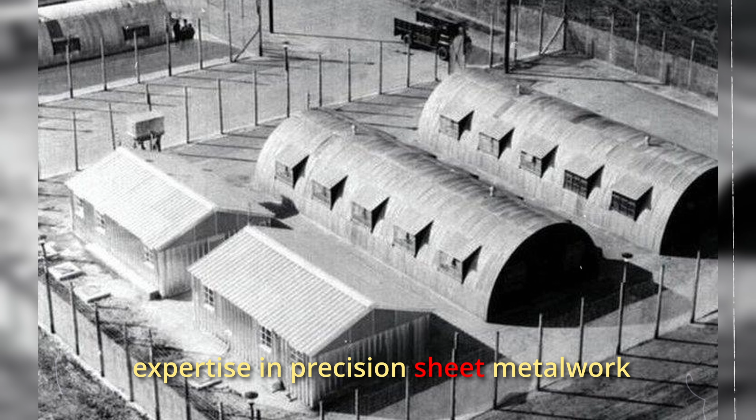The location is not selected randomly or chosen for convenience. Rhode Island possesses deep manufacturing expertise in precision sheet metal work from its jewelry and silverware industries, the kind of exacting metalwork that translates directly to manufacturing building panels with tight tolerances. The state also offers proximity to major steel mills in Pennsylvania and established shipyards that understand marine-grade corrosion resistance better than anyone else in the country.

In March 1942, the Navy assembles an unusual team representing a collision of different professional worlds and specialized expertise: structural engineers from the Stran-Steel Corporation, who have spent years building prefabricated farm buildings; architects from George A. Fuller Construction Company, who specialize in rapid assembly methods and modular construction; and Navy officers who have actually served extended tours in the Pacific theater and know what typhoon-proof really means in practice versus what it means on paper in a comfortable stateside office.

The team lead, Otto Brandenberger, brings farm building experience that turns out to be precisely right for this seemingly impossible problem. His Stran-Steel agricultural barns use self-supporting arched panels requiring no internal frame whatsoever, which means no wood for termites to devour and no complex joinery to fail catastrophically during violent storms.

Farm buildings face their own set of extreme environmental conditions: Midwest tornadoes with devastating wind speeds, massive snow loads that collapse weaker structures, temperature swings ranging from well below zero to over 100 degrees, and the expectation of decades of continuous use with absolutely minimal maintenance. Brandenberger's radical proposal violates every piece of conventional architectural wisdom accepted as gospel truth in 1942.

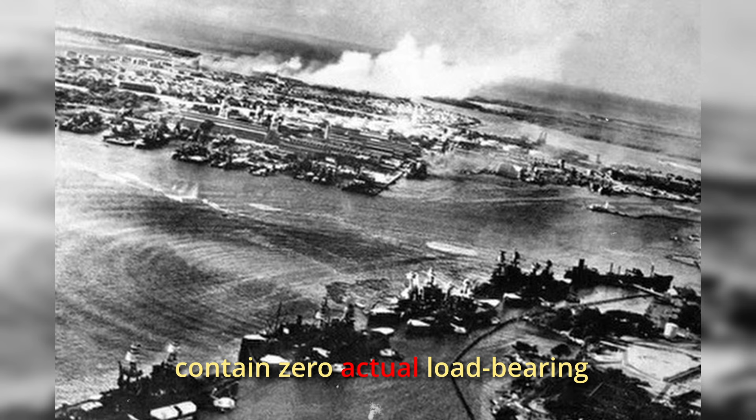The detailed British field reports read like genuine horror stories from a nightmare dimension, where buildings possess malevolent life and actively conspire against human occupants. But these reports provide the Quonset development team with something genuinely invaluable: a comprehensive checklist of everything that must be completely engineered out of the final design from day one before the first working prototype gets constructed and tested.

No wood can remain in direct contact with ground surfaces where moisture and destructive insects naturally concentrate their activity.

All steel components must receive hot dip galvanization treatment, not merely painted surface coating, because conventional paint fails completely in saltwater air within a matter of weeks. Ventilation systems must be aggressive enough to actively prevent interior condensation that literally rains from ceiling surfaces. Every single fastener must remain accessible for field replacement without requiring complete disassembly of the entire shelter structure.

By April 1942, the hybrid engineering vision crystallizes into something that might actually function in real-world combat conditions. Take the Nissen hut's genuinely brilliant arch geometry that has already proven itself effective across multiple combat theaters. Systematically strip out everything that makes it excessively heavy, environmentally vulnerable, or dependent on skilled construction labor. Incorporate Fuller's mass production philosophy that treats buildings as factory-manufactured products rather than custom construction projects. Apply American steel manufacturing industrial capacity that can produce standardized components by the thousands per week. Then, meticulously engineer every single design detail specifically for the unique environmental hell of Pacific Island warfare.

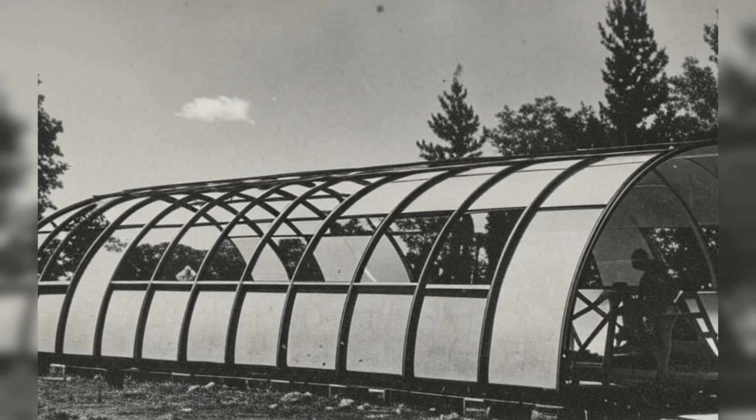The result is not merely an incremental improvement on existing military shelter designs. It represents something genuinely revolutionary, born from desperate crisis and impossible deadlines, and the kind of radical innovation that only emerges when conventional failure means young men dying miserably in tropical rain. April 15, 1942.

Otto Brandenberger walks into a Quonset Point warehouse accompanied by 30 hand-selected engineers and facing a deadline that would be absolutely laughable if the overall war situation were not so desperately critical. 60 days to complete design work, construct working prototypes, conduct field testing, and secure final approval for a completely new building system that does not yet exist even on paper.

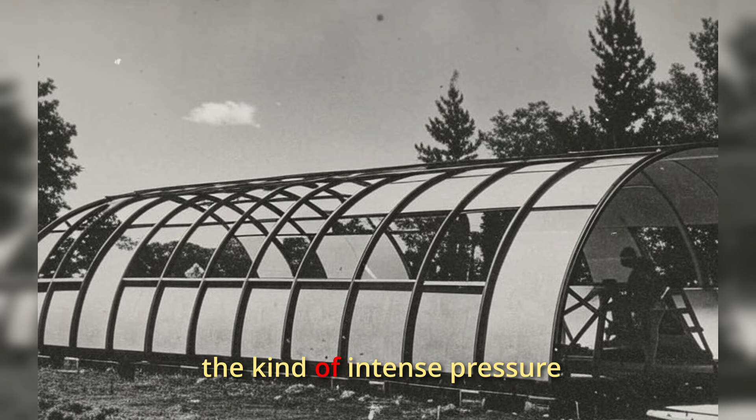The assembled team works in continuous rotating shifts around the clock, sleeping on military cots pushed against warehouse walls, subsisting on Navy mess hall coffee, and the kind of intense pressure that either produces genuine brilliance or triggers complete psychological collapse.

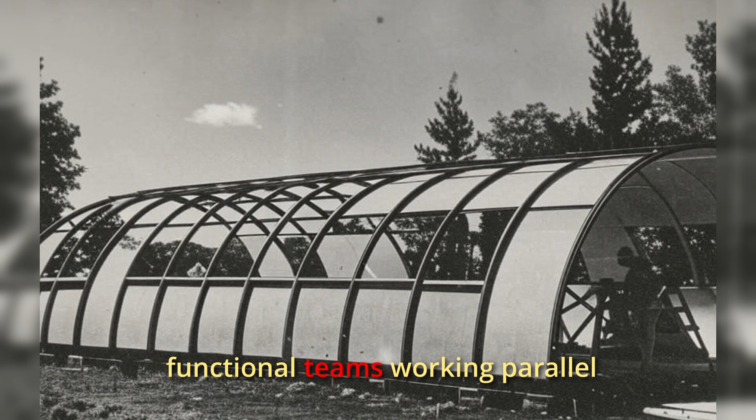Brandenberger divides his engineering crew into specialized functional teams working parallel development tracks. One group tackles complex aerodynamics calculations and structural loading analysis. Another team figures out how to efficiently nest individual components for maximum shipping density. A third works exclusively on solving the joint and fastener problems that plagued the original British design and caused field failures. The first truly radical decision happens on day 3 of the 60-day countdown.

Traditional architectural drawings require weeks of careful production time, and the development team simply does not have weeks to spare. Instead, they construct and test in real time using iterative prototyping. Sketch a design detail in the morning, have the metalworking shop fabricate actual components by afternoon, conduct stress testing overnight, and revise based on failure analysis by dawn.

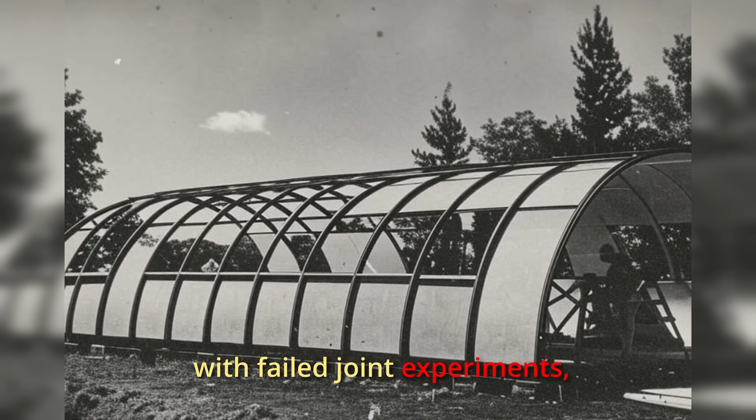This rapid iterative prototyping approach is completely standard engineering practice in 2025, but represents revolutionary methodology in 1942 when buildings are designed completely on paper before a single physical piece gets cut or formed. The warehouse floor rapidly becomes a chaotic laboratory scattered with failed joint experiments, bent and broken test panels, and increasingly refined versions of each critical component.

The engineers deliberately steal a proven technique from aircraft manufacturing protocols. Every single part receives a unique identifying number. Every design revision gets thoroughly documented with detailed notes. Nothing advances to the next prototype generation without conclusively solving all failure points identified in the previous version. The final structural dimensions emerge from brutal practicality rather than aesthetic considerations or architectural fashion.

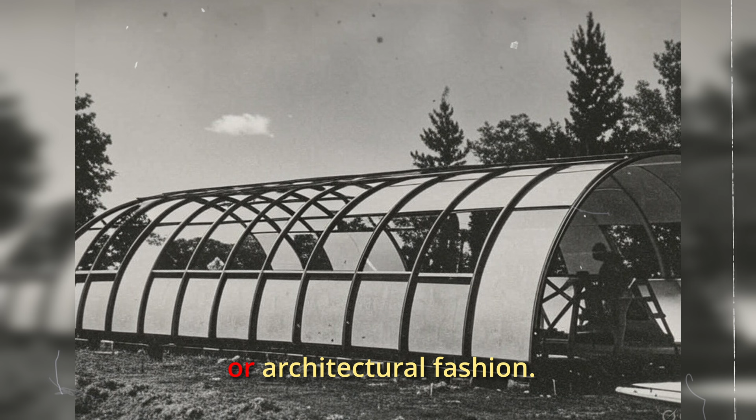16 feet wide represents the absolute maximum width that fits on a standard American railcar without requiring special permits or custom shipping arrangements. 20 feet long per individual section, short enough that 4 average men can physically lift and maneuver a single panel, but long enough to create genuinely usable interior space when sections connect. 48 feet total length when fully assembled, providing housing capacity for 36 men with stacked bunks, or converting to office space, medical treatment stations, or supply storage facilities.

The Quonset development team discovers through extensive testing that this specific size combination hits a genuine sweet spot in structural engineering principles. Make the shelters smaller, and you waste precious shipping capacity moving air instead of usable structure. Make it larger, and individual panels become too heavy for field assembly by exhausted troops, or the arch geometry starts requiring internal support members that reintroduce all the problems they are systematically trying to eliminate.

The arch radius calculation alone consumes 2 full weeks of the precious 60-day development deadline. Too flat and wind forces could peel the entire structure apart like opening a sardine can, with catastrophic results. Too steep and you waste valuable interior headroom while creating difficult end-wall geometry that complicates manufacturing and assembly. Brandenberger's team settles on an 8-foot radius, creating a perfect semicircle that provides 7 feet of usable headroom at the sidewalls and generates what structural engineers call a self-bracing arch configuration.

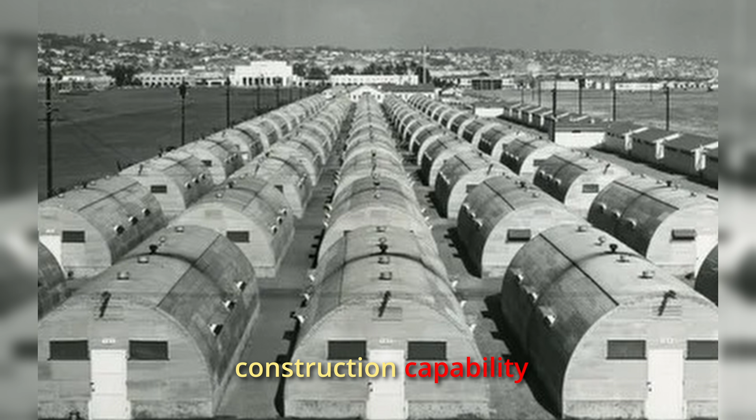The Navy wants reliable single-day construction capability because marine amphibious landing schedules absolutely do not allow for multi-day building projects on contested beaches. The development team identifies the critical bottleneck immediately: the floor system.

They have been attempting to include a wooden floor as part of the basic package, but flooring represents the slowest component to assemble and the first structural element to rot completely in tropical conditions anyway.

The solution emerges as elegant in its radical simplicity: eliminate the floor entirely from the basic shelter design. The hut sits directly on whatever surface currently exists - coral, sand, volcanic dirt, or if you are exceptionally lucky, gravel.

For specific applications requiring finished floors, those can be added later as separate construction projects using local materials. But the basic shelter structure achieves complete weather protection without any floor system whatsoever.

This single design decision cuts assembly time to 8 hours and reduces total shipping weight by 1,200 pounds per complete unit. On June 10, 1942, the final approved prototype stands complete and ready for formal evaluation.

96 individual corrugated steel panels, each weighing less than 50 pounds, bolt together to create 720 square feet of fully enclosed protected space. Total materials cost: $1,394. Total shipping weight: 9,000 pounds.

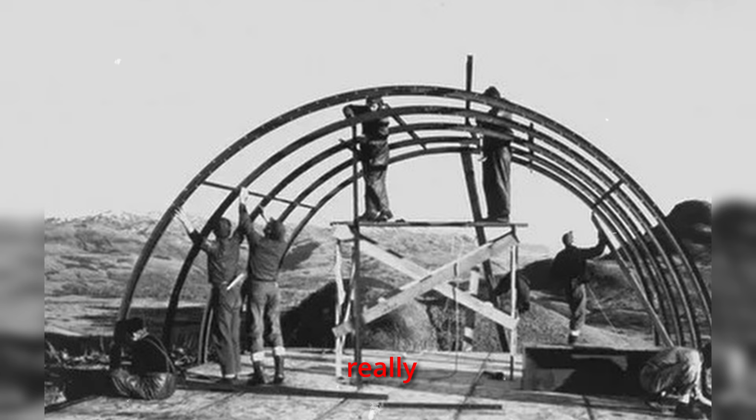The assembly process on the receiving end is where Quonset design genius really shines in practical application. The Navy's construction battalions, the famous Seabees, develop standardized procedures that transform shelter erection into a precisely choreographed military operation: 6-man crew, 8 hours, 1 complete hut ready for immediate occupation.

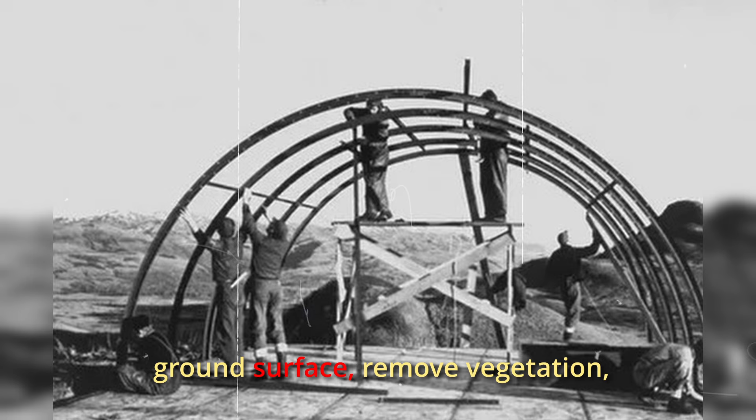The process starts with basic site preparation. Level the ground surface, remove vegetation, lay down a gravel base if materials are available. 2 men handle the end walls, while 4 crew members wrestle the steel panels into position.

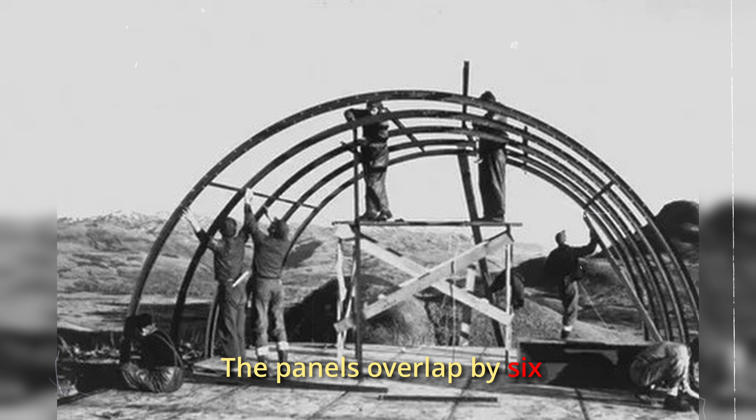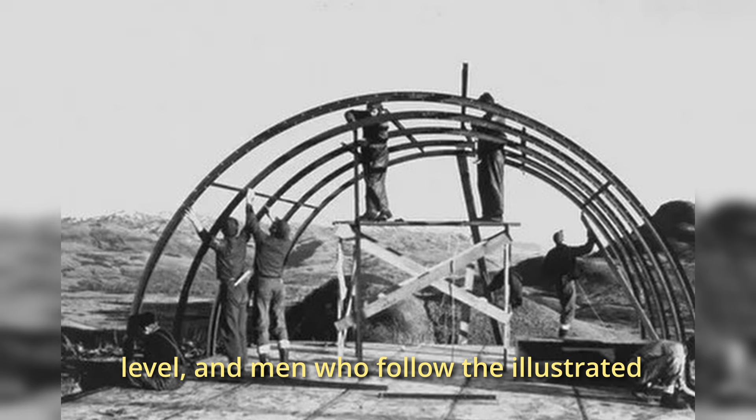The panels overlap by 6 inches and bolt together with those 3/4-inch fasteners. No welding equipment required, no concrete needed, no skilled trades necessary, just standard wrenches, a level, and men who follow the illustrated instructions carefully.

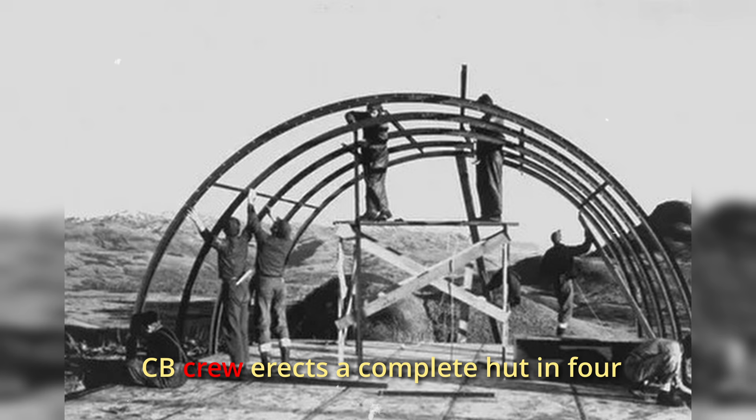The official speed record gets set on Espiritu Santo in January 1943 when a specially trained Seabee crew erects a complete hut in 4 hours and 17 minutes. But that represents showboating for the record books.

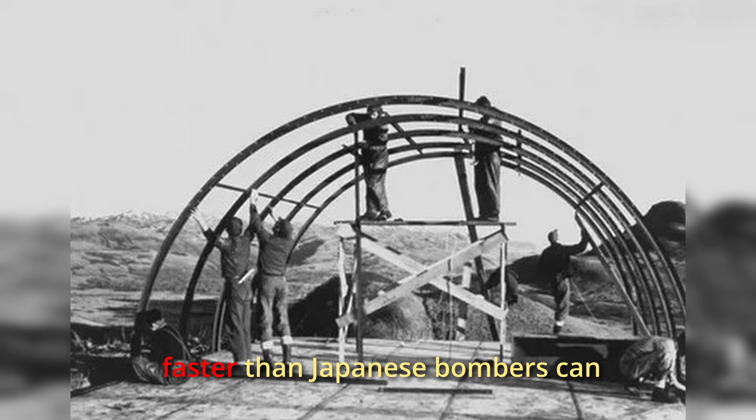The real sustained achievement is continuous production across hundreds of islands where crews assemble 5 or 6 complete huts per day, day after day, building entire forward bases faster than Japanese bombers can destroy them.

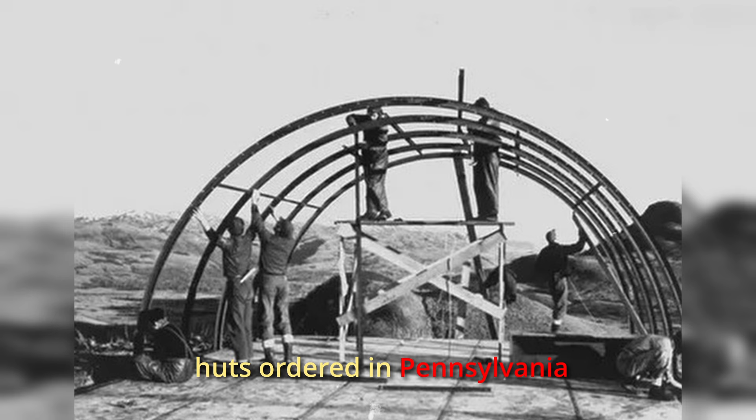By December 1943, monthly production hits 8,000 units, and the logistics network moves so efficiently that huts ordered in Pennsylvania reach New Guinea within 40 days total transit time, including ocean crossing and trans-Pacific transport.

The cost accounting tells the ultimate victory story in stark numbers. Each Quonset hut provides 36 men with weatherproof shelter for $1,394 in materials and approximately 60 man-hours of assembly labor.

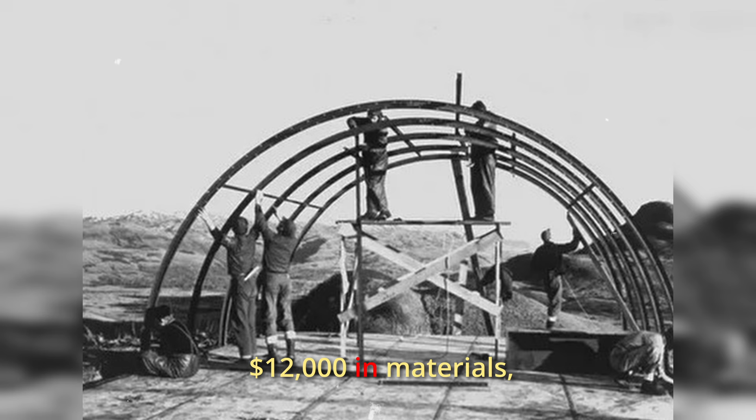Compare this to conventional barracks construction: $12,000 in materials, 400 man-hours of skilled carpentry labor, and 6 weeks total construction time. The Quonset delivers equivalent shelter at 1/10 the cost in 1/20th the time.

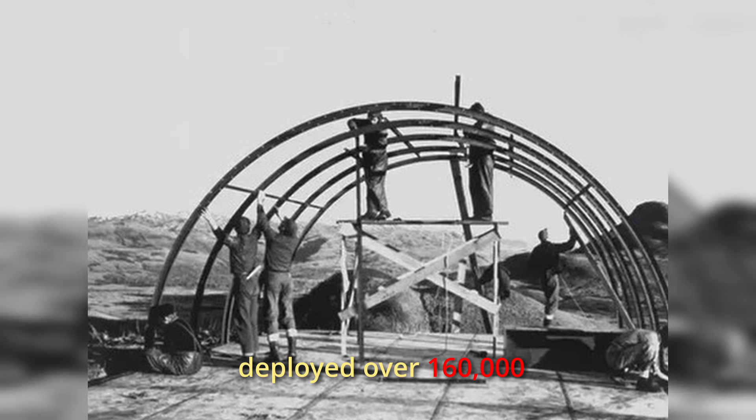By mid-1944, the U.S. military has deployed over 160,000 units to every combat theater. That represents housing capacity for nearly 6 million personnel built in less than 2 years.

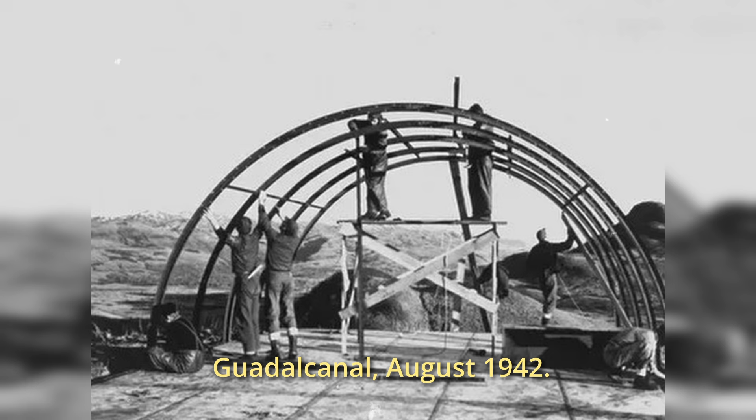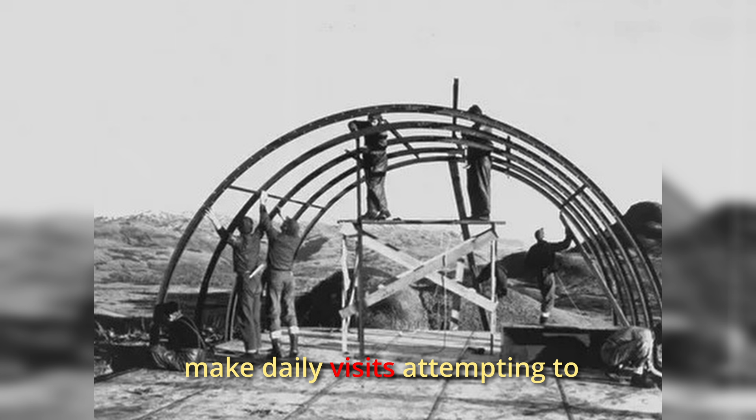Guadalcanal, August 1942. The first combat-deployed Quonset huts arrive on a beach where the temperature hovers at 95 degrees with 90% humidity, and Japanese bombers make daily visits attempting to crater anything resembling American infrastructure.

Marine engineers unload the flat-packed steel panels under sporadic artillery fire and start bolting them together in a coconut grove, still showing fresh scorch marks from the previous week's shelling.

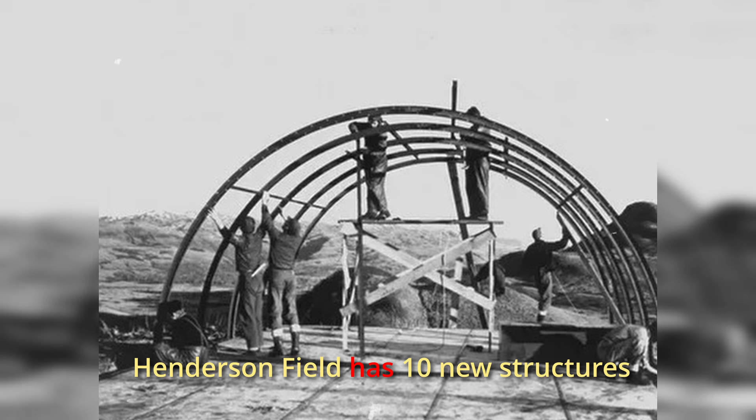Within 12 hours, Henderson Field has 10 new structures, housing exhausted maintenance crews for the battered F4F Wildcats operating from the makeshift airstrip. The real brutal test comes 3 days later, when a Japanese bombing run scores a near miss.

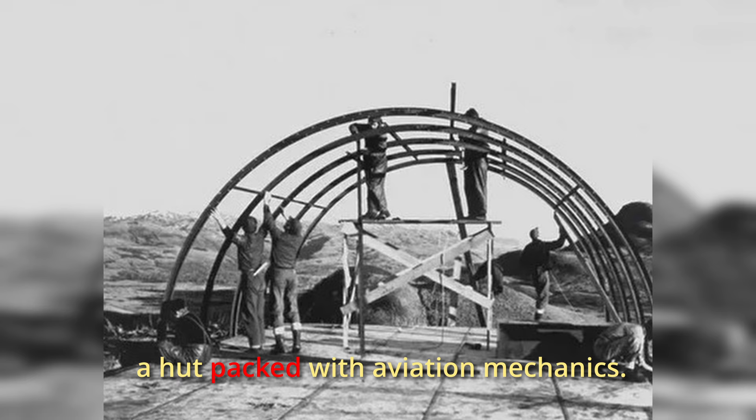A 500-pound bomb detonates 40 yards from a hut packed with aviation mechanics. The massive blast wave flattens...

Surrounding palm trees and shreds canvas tents like tissue paper, but the Quonset flexes under the shock wave. Dirt and shrapnel rattle off the corrugated steel like hail. When the smoke finally clears, the structure stands intact with every man inside, shaken but alive and functional.

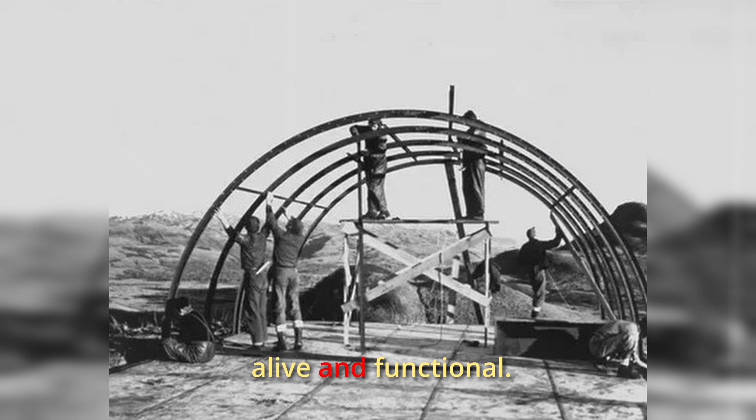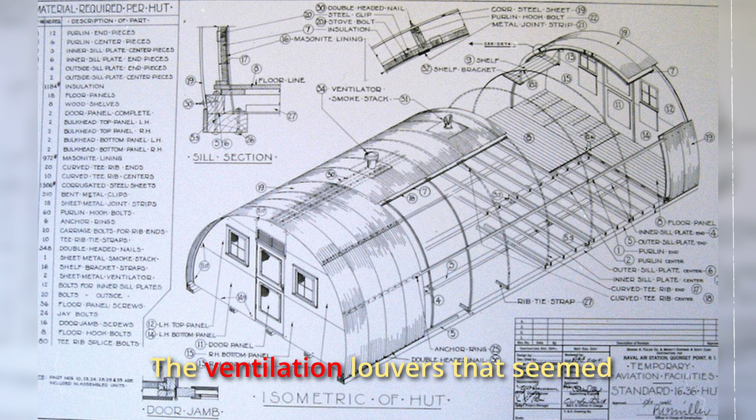The unforgiving jungle environment proves as hostile as direct enemy action. Within 2 weeks, red rust streaks appear on any ungalvanized fasteners. The corrosive saltwater air eats through standard hardware like acid. Fungus grows on everything that holds moisture, turning the inside surfaces into abstract art exhibits of black and green mold. The ventilation louvers that seemed adequate in Rhode Island testing barely move the suffocating air.

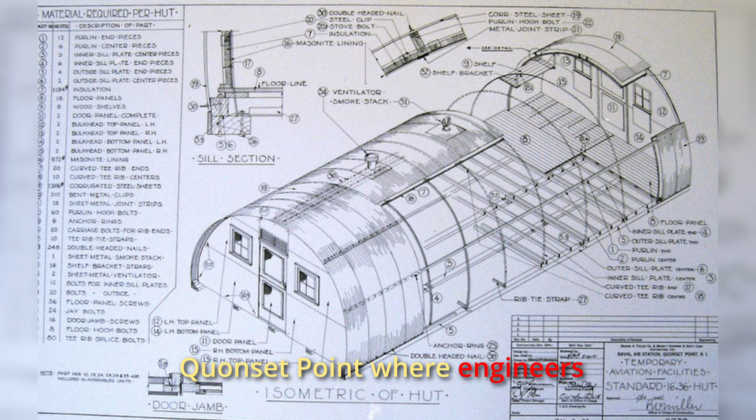Marines start propping doors open 24 hours and cutting additional vent holes with tin snips, technically violating structural specifications, but making the huts actually livable. These field modifications get carefully documented and sent back to Quonset Point, where engineers immediately incorporate them into later production runs. More ventilation openings, larger louvers, and every single fastener galvanized regardless of location or function.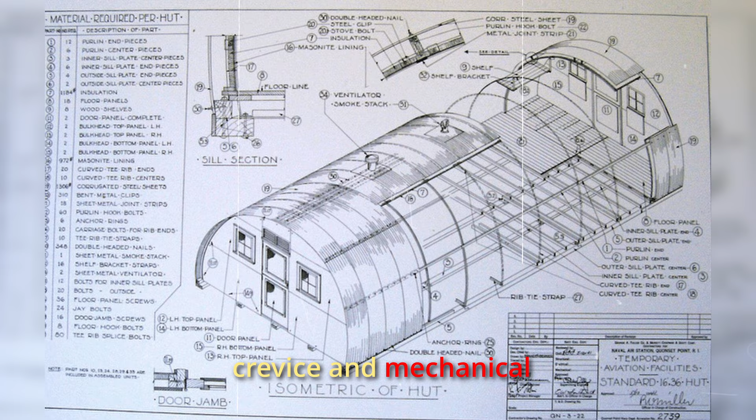Iwo Jima, February 1945. The volcanic island offers a completely different kind of environmental hell. Black volcanic sand that blows into every crevice and mechanical joint, no topsoil whatsoever for grounding stakes, and the constant threat of artillery from Mount Suribachi dominating the island.

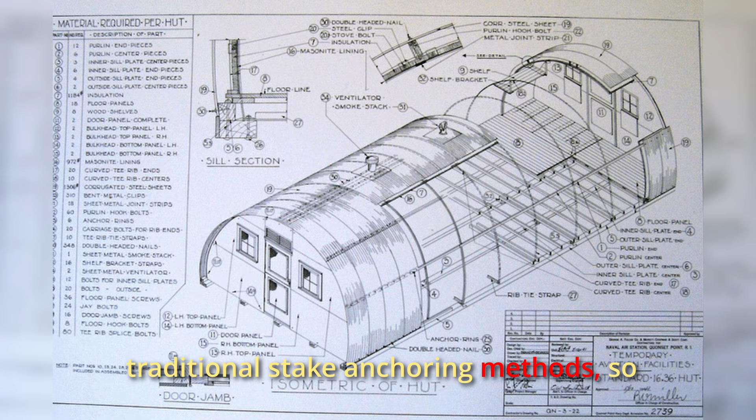Seabees arrive on D-Day +2 and start assembling Quonset huts, literally under fire, bolting panels together while mortar rounds impact 200 yards away. The volcanic sand proves impossible for traditional stake anchoring methods, so crews improvise on the spot by filling empty oil drums with sand and running cables connecting drums to the hut bases. When a Pacific typhoon hits in March with 110-mile-per-hour winds, those improvised anchors hold perfectly while wooden structures across the entire island disintegrate.

The base commanders report back to Pearl Harbor as succinct and powerful: Quonset huts survived, everything else gone.

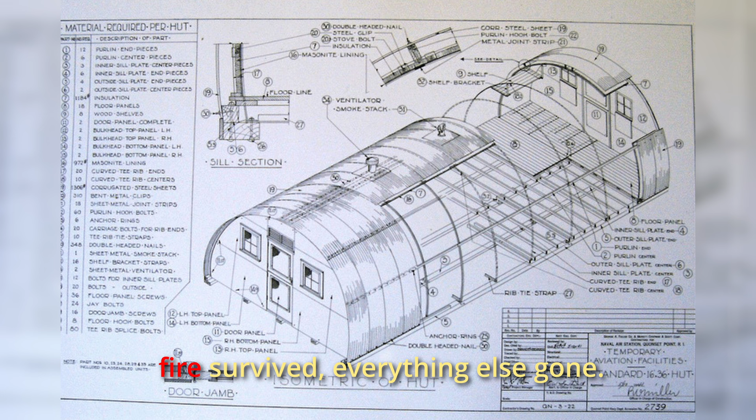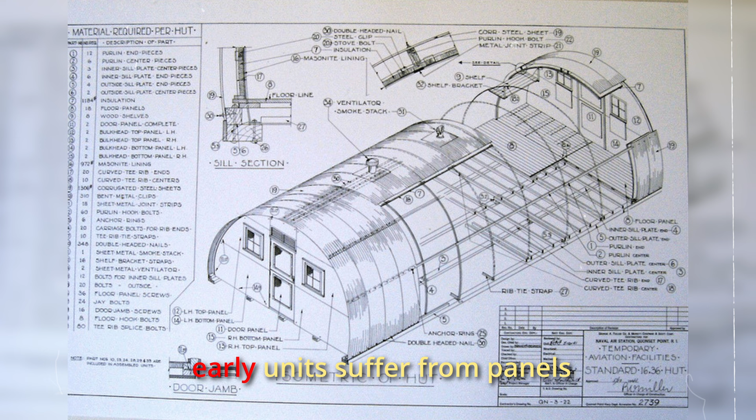The Arctic environment tests the design from the opposite extreme end of the climate spectrum. Alaska's Aleutian Islands campaign sees Quonset huts deployed at Dutch Harbor and Adak, where temperatures plunge to -40 degrees and winds regularly exceed 100 miles per hour. The extreme cold makes the steel brittle, and early units suffer from panels cracking at the bolt holes under thermal stress. Engineers respond by specifying cold-rolled steel with different metallurgy specifically for Arctic deployments and adding rubber gaskets at every joint to maintain flexibility.

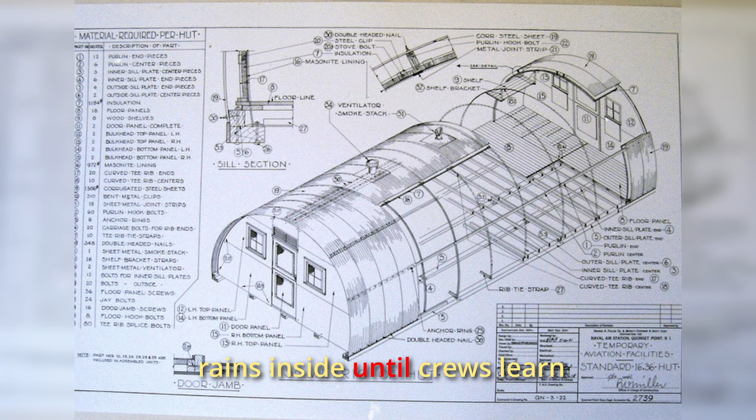Heating the huts creates its own set of problems. Warm interior air meeting frozen steel produces condensation that literally rains inside until crews learn to install insulation blankets and run continuous ventilation even in sub-zero weather. By winter 1943, weatherized Quonset models include internal insulation batting, double wall construction for extreme cold zones, and modified ventilation systems that prevent heat loss while managing moisture.

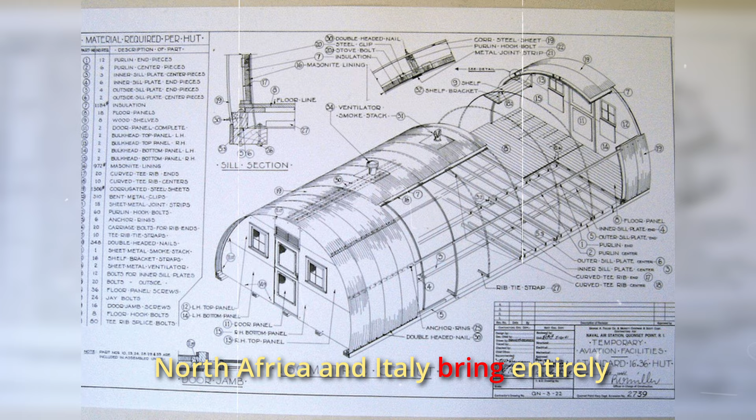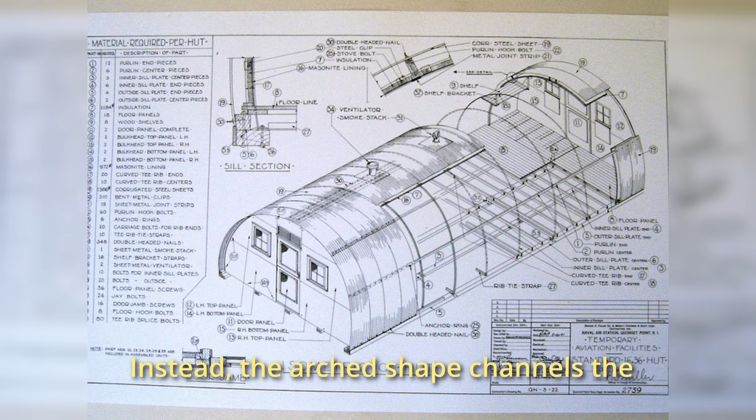North Africa and Italy bring entirely different challenges. At Palermo, Sicily, a Quonset hut pressed into emergency service as an ammunition depot takes a direct hit from a German 88mm artillery shell. The shell penetrates the steel skin, detonates inside among crates of small arms ammunition, and the resulting explosion should theoretically vaporize the structure completely. Instead, the arched shape channels the blast force outward through the walls and roof in a pattern that leaves the structural frame twisted but standing.

EOD crews examining the wreckage note that a rectangular building would have collapsed completely, trapping anyone nearby under tons of rubble. The arch's inherent strength, that compression ring effect, means even catastrophic damage does not trigger total structural failure.

The Pacific typhoon season of 1944 delivers the ultimate stress test. Super Typhoon Cobra hits the Philippines in December with winds measured at 140 miles per hour and a 20-foot storm surge. At Tacloban, the storm destroys 80% of all structures on the base. Wooden buildings explode into splinters. Concrete block structures collapse when wind undermines their foundations. But of 43 Quonset huts on the base, 39 survive completely intact and 4 suffer repairable damage consisting of bent panels and torn seams, but no total failures.

Engineers analyzing the survivors find that proper anchoring matters more than any other single factor. Huts with adequate ground attachment ride out the storm. Those with improvised or insufficient anchoring roll like tumbleweeds.

May 8, 1945, victory in Europe. August 15, 1945, victory over Japan. Suddenly, the United States military owns roughly 170,000 Quonset huts scattered across 6 continents and has absolutely no clear idea what to do with them. The original strategic plan assumed these were temporary wartime expedients that would be scrapped or abandoned once permanent facilities could be constructed. But something completely unexpected happens: nobody actually wants to get rid of them.

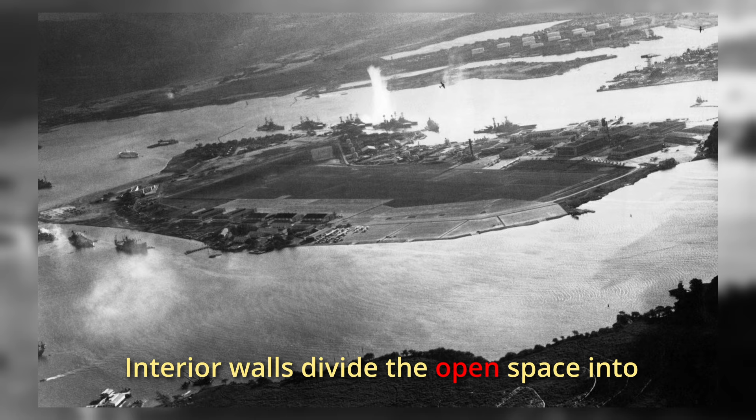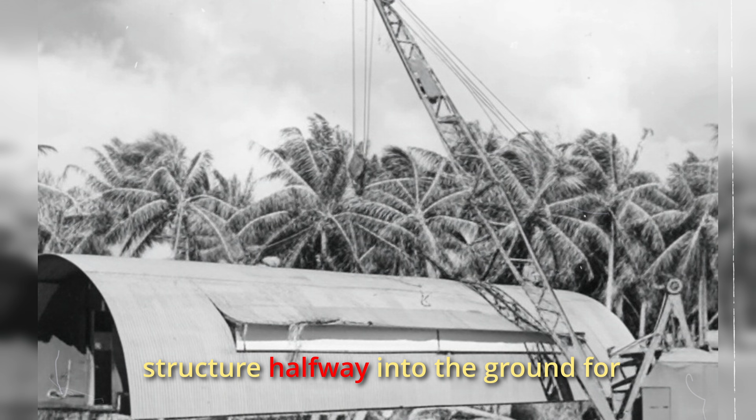The architectural adaptation gets genuinely creative, remarkably fast. Families add wooden facades to the curved ends, making the structures look less like military surplus and more like quirky cottages with character. Interior walls divide the open space into separate bedrooms, living areas, and functional kitchens. Windows get cut into the steel sides, technically violating every structural principle, but making the spaces actually livable for family life. Some ambitious owners go further, burying the entire structure halfway into the ground for earth-sheltered insulation, or connecting multiple huts end-to-end to create sprawling compound homes.

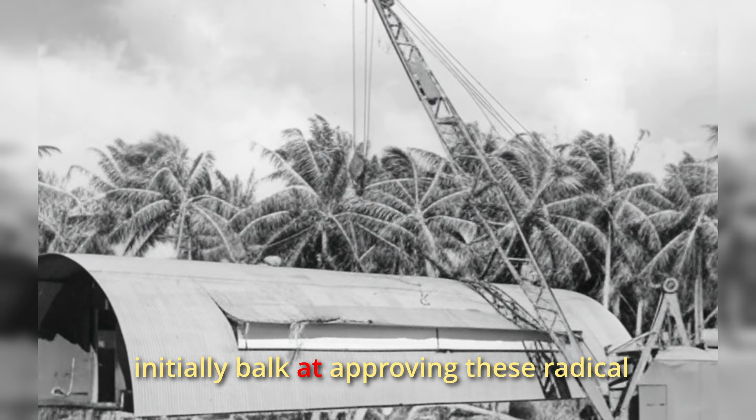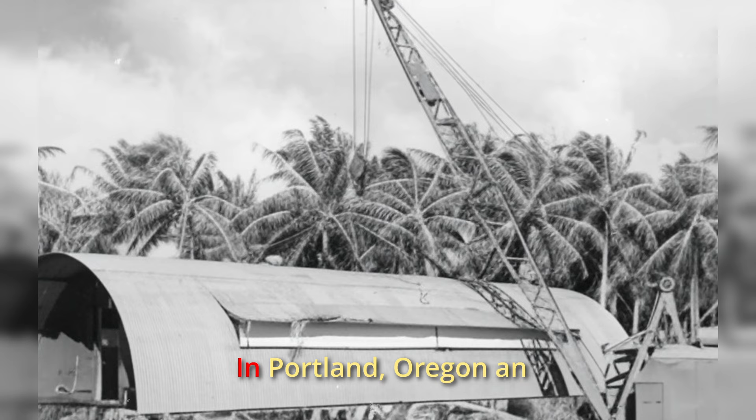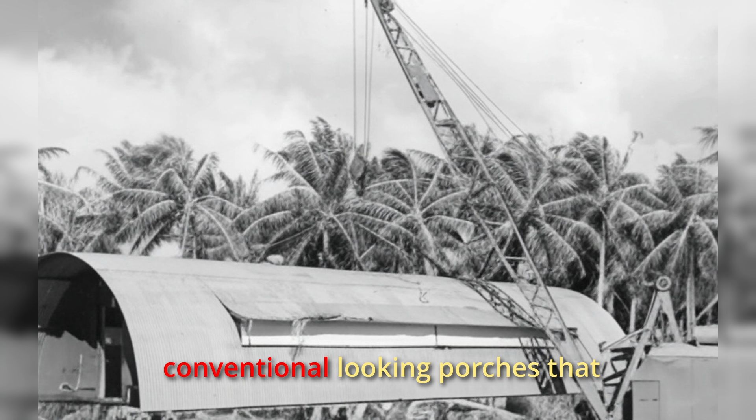Housing inspectors and building code officials initially balk at approving these radical modifications. But the housing shortage is so desperately acute that municipalities reluctantly grant permits rather than leave families homeless. In Portland, Oregon, an entire neighborhood called Fairview Addition consists of 350 Quonset homes. Residents plant gardens, paint their steel walls cheerful colors, and build conventional-looking porches that disguise the utilitarian military origins.

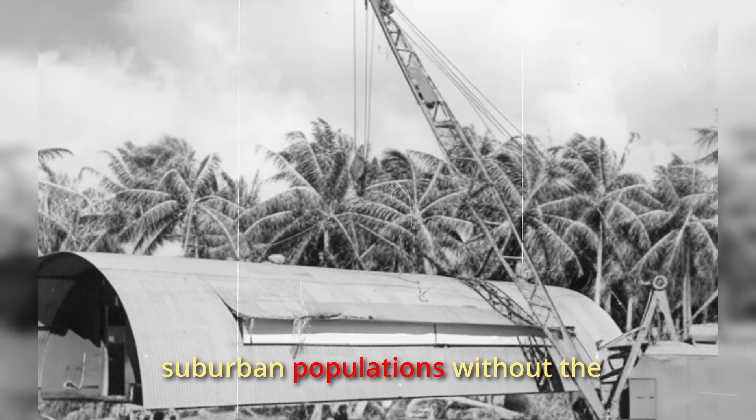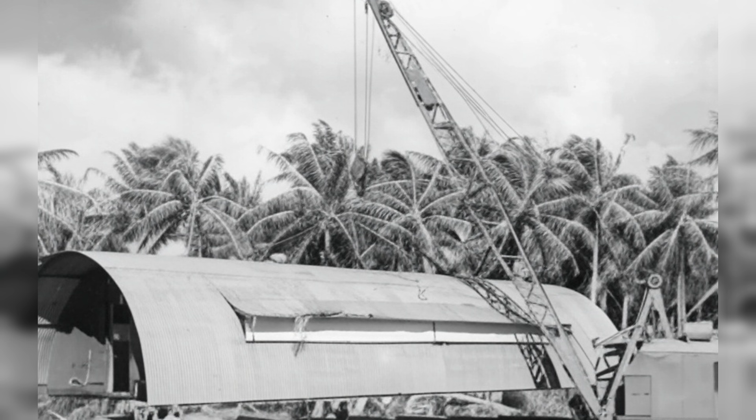Churches discover Quonset huts solve a completely different problem, providing worship space for exploding suburban populations without the decade-long capital campaigns traditional church buildings require. First Presbyterian Church of Levittown, Pennsylvania holds regular services in a Quonset hut from 1952 until 1967, when they finally raise sufficient funds for a conventional sanctuary. Dozens of congregations make the same practical calculation.

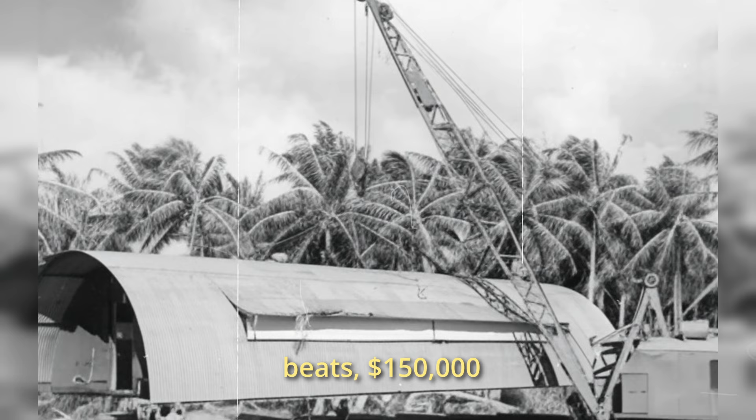$2,500 for immediate usable space beats $150,000 for eventual architectural grandeur. The acoustics are admittedly terrible, the aesthetics underwhelming, but people can gather for worship next month instead of next decade. Some of these temporary church huts remain in continuous service for 30 years, outlasting the generations who first considered them stopgap solutions.

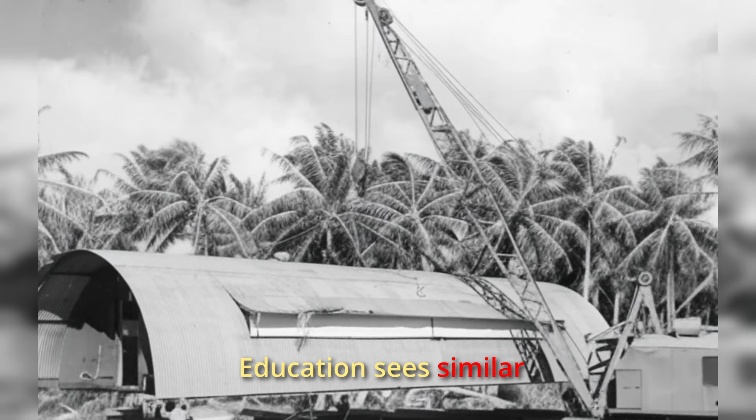Education sees similar widespread adoption. Post-war school enrollment explodes as the baby boom hits, and school districts face the same impossible mathematics that plagued the military in 1942. They need classroom space immediately, and conventionally built schools take years to design and construct.

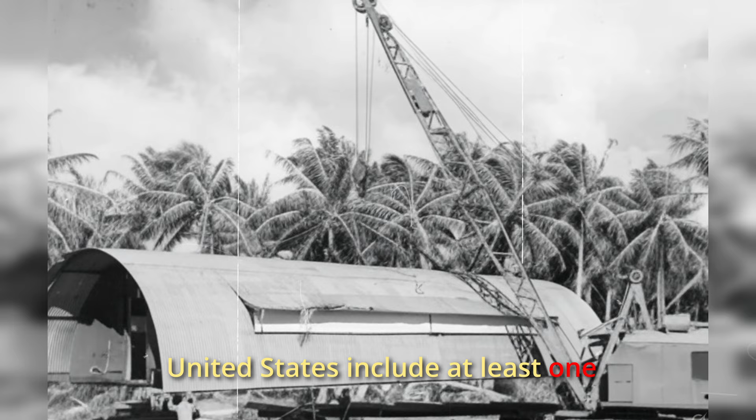Rural districts especially embrace Quonset classrooms. A single hut provides space for 30 students at one-tenth the cost of traditional school construction. By 1950, an estimated 3,000 schools across the United States include at least one Quonset hut classroom. Some students spend their entire elementary education in these steel tunnels, learning multiplication tables and history lessons under curved ceilings that once sheltered B-29 crews in the Pacific.

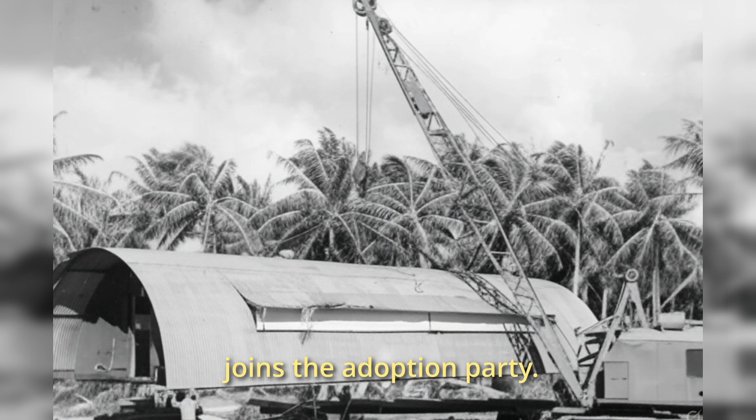The commercial sector enthusiastically joins the adoption party. Small businesses, machine shops, auto repair garages, warehouses, farm equipment storage operations recognize that Quonset huts deliver clear-span space without internal support columns, making them absolutely perfect for industrial work. A welder can set up a complete shop in a surplus hut for less than two months' rent in conventional commercial space. Agricultural use proves especially popular and widespread.

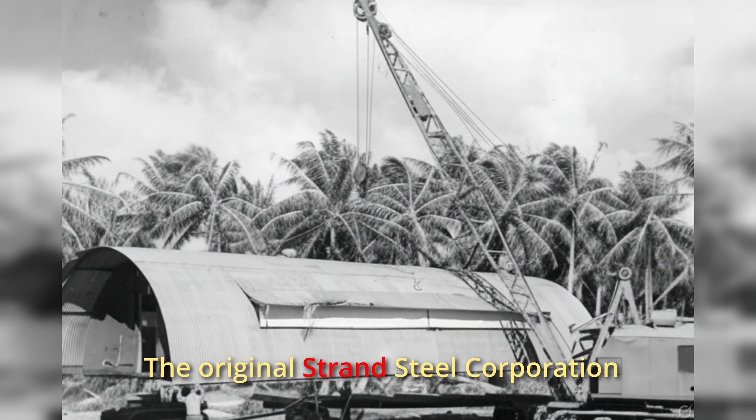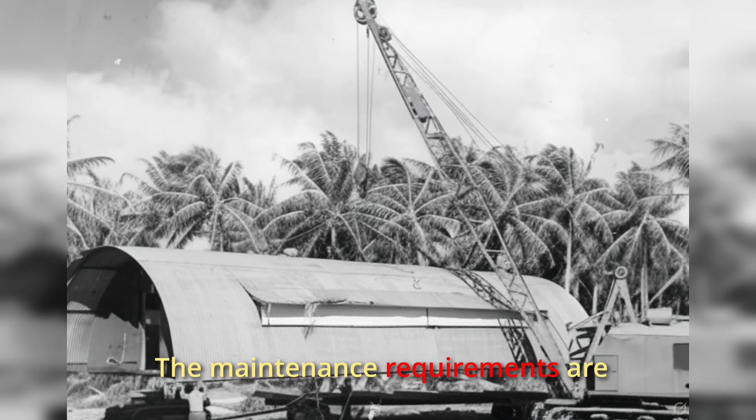The original Stran-Steel Corporation, having helped design military Quonsets, returns to manufacturing civilian versions specifically marketed to farmers and ranchers. Thousands of Midwestern farms add Quonset storage buildings for grain, equipment, and livestock shelter. The maintenance requirements are refreshingly minimal. Hose off the exterior once a year, check the bolts occasionally, and the structure lasts indefinitely.

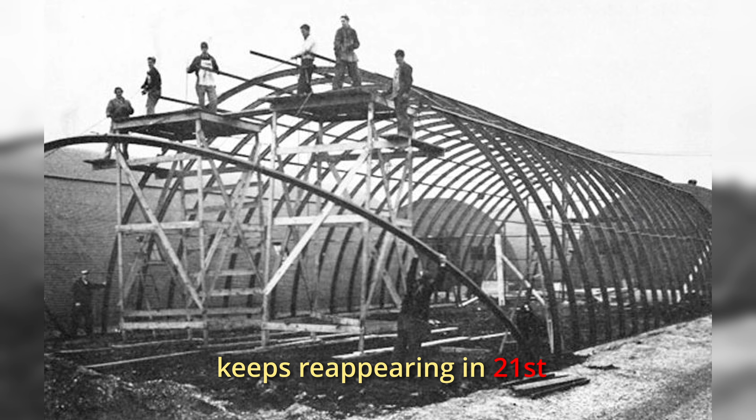Modern disaster zones tell you everything about why the Quonset hut's engineering DNA keeps reappearing in 21st century emergency response. When the 2010 Haiti earthquake destroys Port-au-Prince, relief organizations face the same fundamental equation American military planners confronted in 1942: immediate shelter for hundreds of thousands of displaced people, no existing infrastructure, no time for conventional construction, and environmental conditions that destroy inadequate temporary housing within months.

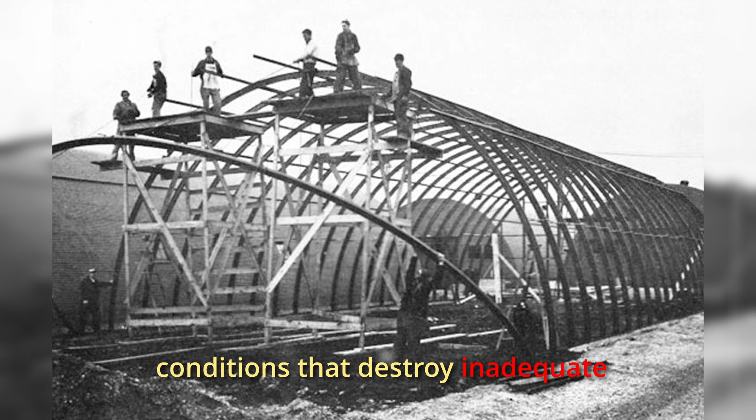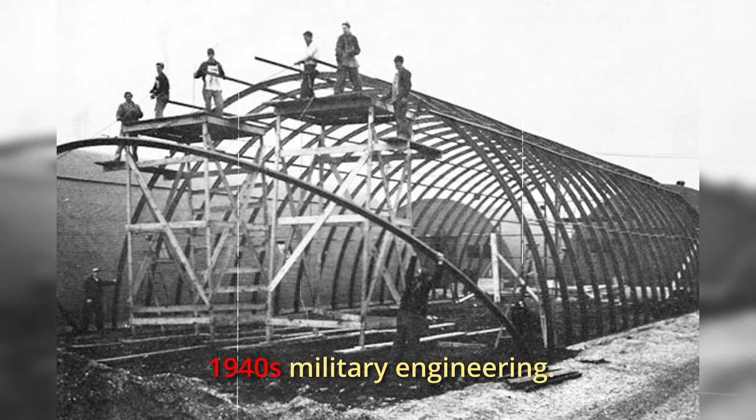The solution that emerges borrows directly from Quonset principles, even when contemporary designers do not consciously realize they are channeling 1940s military engineering: arched steel frames, corrugated metal panels, prefabricated components that ship flat and assemble quickly.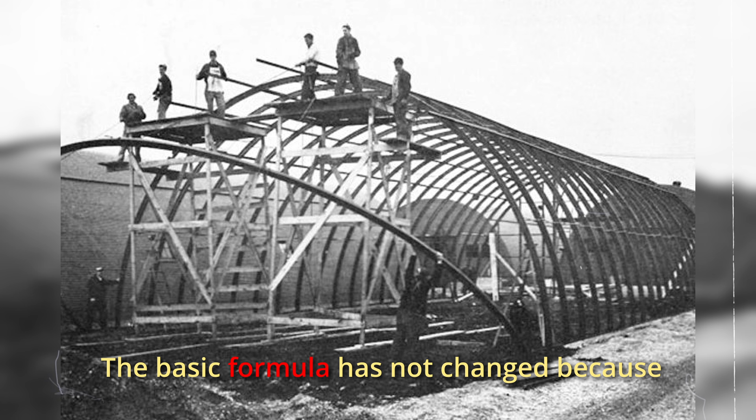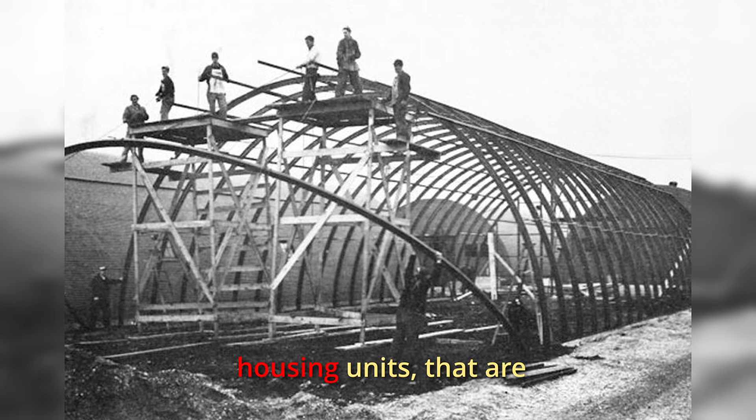The basic formula has not changed because the underlying physics and logistics have not changed one bit. The United Nations High Commissioner for Refugees currently uses shelter systems called RHUs, refugee housing units, that are essentially Quonset huts incorporating 80 years of material science improvements. Instead of corrugated steel, they use insulated composite panels. Instead of bolt-together assembly, they employ snap-fit connections. But the core concept remains absolutely identical.

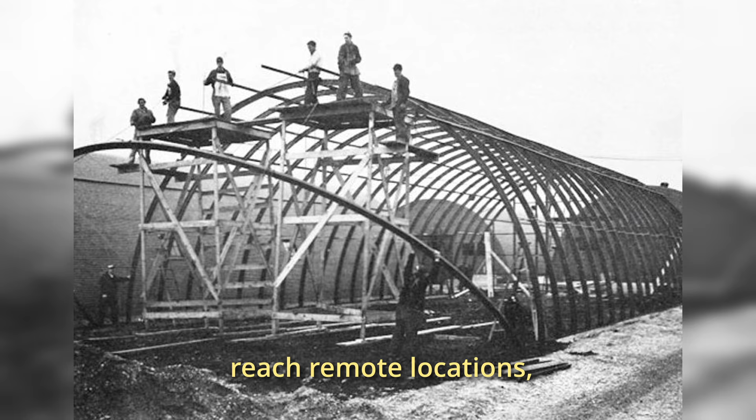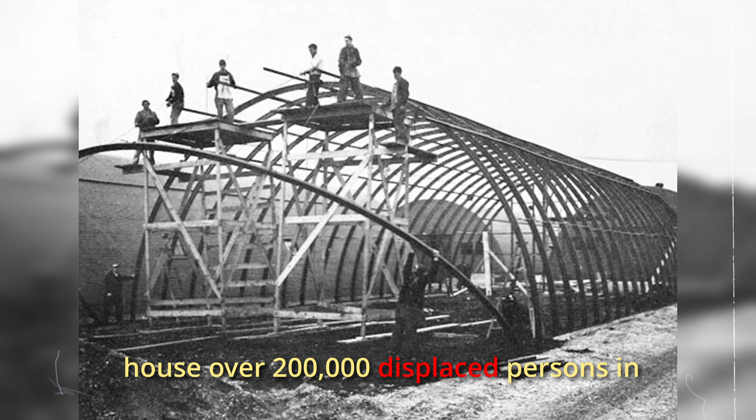Curved profile for structural efficiency and wind resistance, self-supporting arch eliminating internal framing, flat-pack shipping allowing massive quantities to reach remote locations, and assembly by unskilled labor with minimal tools. A two-person crew can erect a modern RHU in 4 hours, almost exactly matching the 1942 Quonset specifications. These units currently house over 200,000 displaced persons in refugee camps across Africa, the Middle East, and Asia.

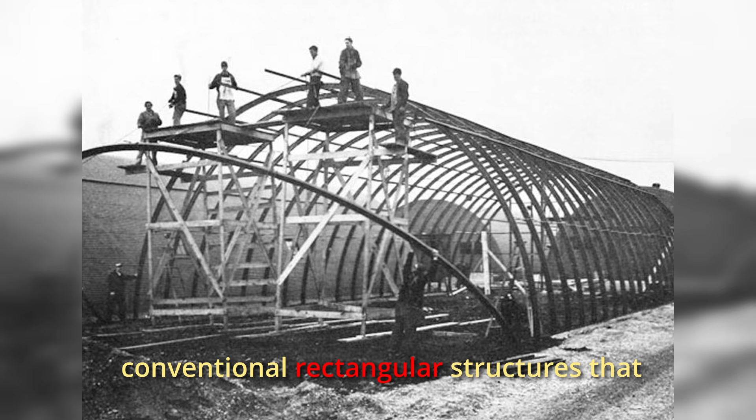Hurricane-resistant construction has rediscovered arch geometry after decades of building conventional rectangular structures that hurricanes repeatedly destroy with monotonous regularity. After Hurricane Katrina devastated the Gulf Coast in 2005, engineers studying which buildings survived found that curved structures consistently outperformed rectangular ones by dramatic margins.

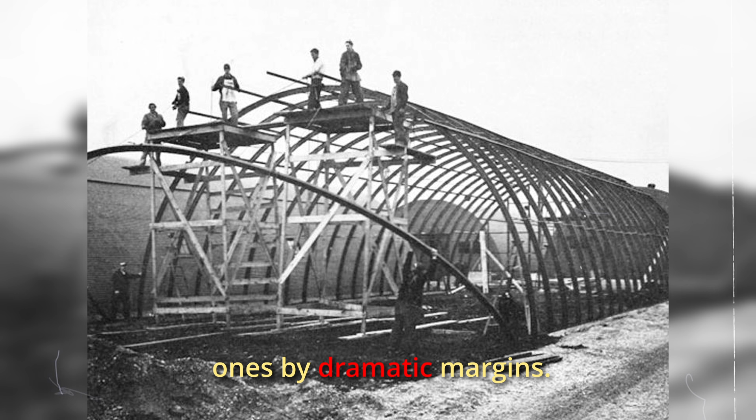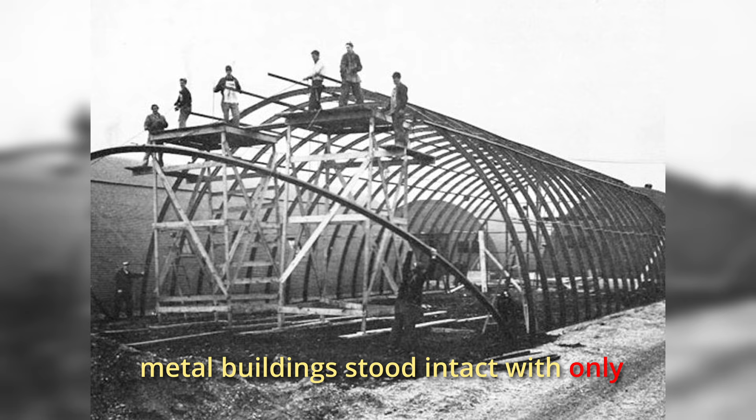The Mississippi coast saw entire neighborhoods of conventional homes reduced to bare foundation slabs, while a handful of Quonset-style metal buildings stood intact with only minor damage. This empirical evidence triggered serious research into what structural engineers now call aerodynamic architecture, designing buildings that work with wind forces rather than resisting them through brute strength. The result looks remarkably like a Quonset hut because the fundamental physics have not changed. Wind flowing over a curve creates significantly less destructive pressure than wind slamming into a flat surface.

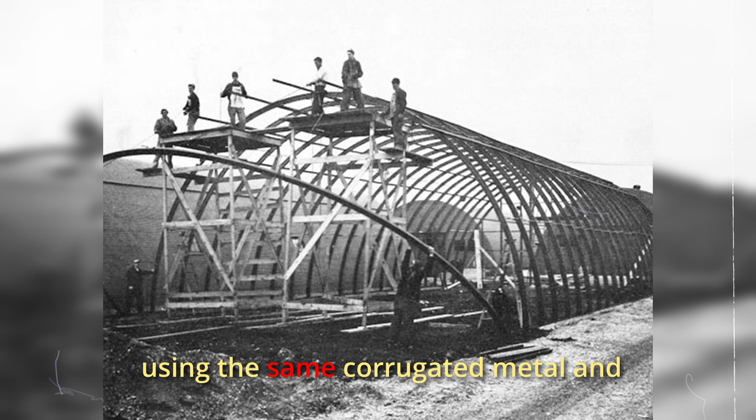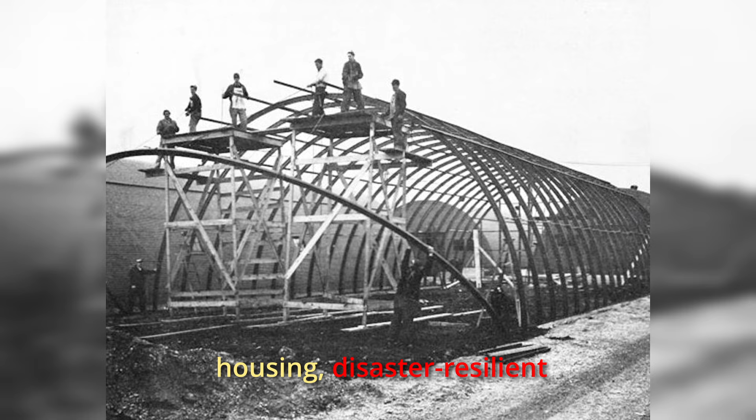Today, exactly as it did in 1942, the modern tiny house movement unknowingly reinvents Quonset principles when designers seek maximum interior space with minimum materials and cost. Several companies now manufacture arch-roofed prefab cabins using the same corrugated metal and self-supporting curve that Otto Brandenberger pioneered 8 decades ago. These sell to buyers seeking affordable housing, disaster-resilient structures, or off-grid living solutions.

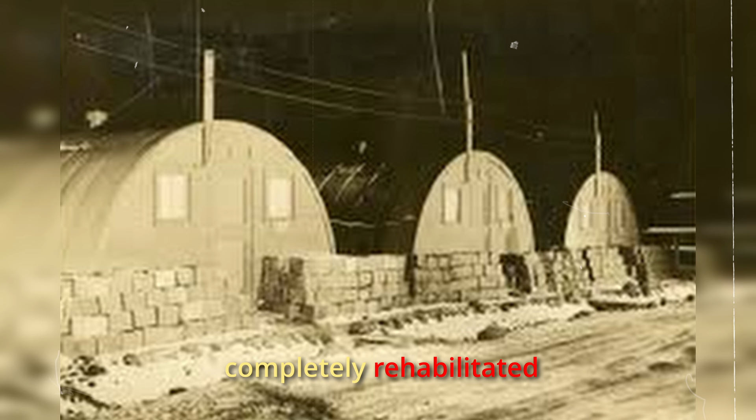The marketing emphasizes sustainability and modern design aesthetics, rarely mentioning that the fundamental architecture is a World War II military shelter. Some high-end architectural firms have completely rehabilitated the aesthetic, designing luxury versions with floor-to-ceiling glass end walls and premium finishes that cost $300 per square foot while maintaining the signature curved profile. The arch has evolved from utilitarian necessity to deliberate design statement.

Military applications never actually stopped using the basic concept. The U.S. Armed Forces still deploy arch-style shelters in conflict zones. Afghanistan, Iraq, and classified locations all feature modern descendants of the original Quonset. Current military specifications call for units that can be helicopter lifted to remote mountain bases, assembled in active combat conditions, and survive IED blast waves.

The materials have dramatically evolved: aluminum alloy frames, Kevlar reinforced panels, integrated climate control systems. But if you showed a 2025 military deployable shelter to the 1942 Quonset Point engineering team, they would immediately recognize their own fundamental design philosophy executed with better materials.

The most recent innovation involves expandable versions that deploy from standard shipping containers, unfold like complex origami, and lock into rigid arch structures within an hour. The economic argument that originally justified Quonset huts in 1942 remains equally compelling today. When disaster strikes or rapid deployment is operationally required, conventional construction simply cannot compete on speed or cost.

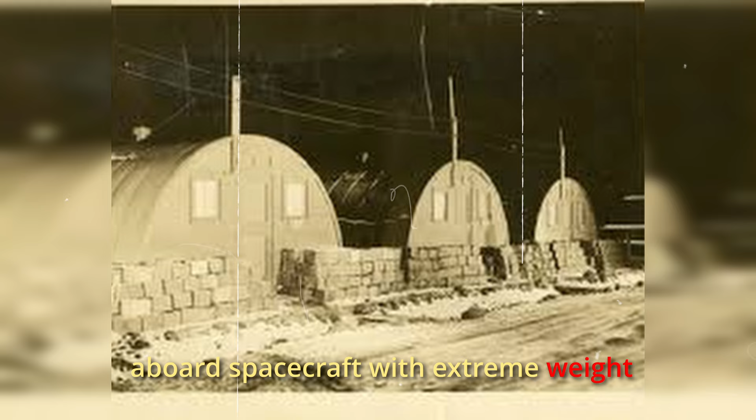Perhaps the ultimate validation comes from space exploration, where NASA and private space companies designing Mars habitats keep independently arriving at Quonset-like solutions. Proposed Martian shelters feature arched profiles to resist the planet's severe dust storms, prefabricated components that ship aboard spacecraft with extreme weight restrictions, and self-supporting structures that do not require extensive foundation work in Martian regolith.

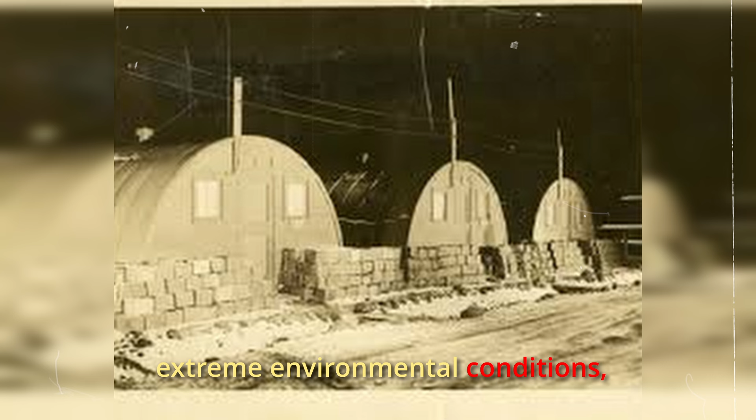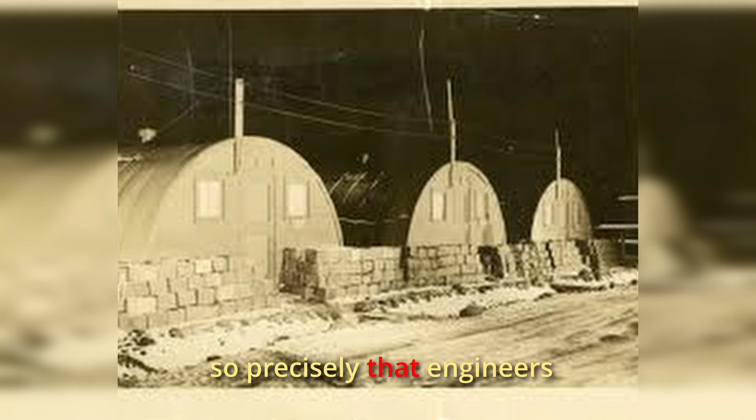The constraints of interplanetary construction, extreme environmental conditions, minimal available tools, unskilled assembly, maximum strength from minimum materials, mirror the Pacific Theater challenges of 1942 so precisely that engineers independently rediscover the same fundamental solutions.

When humans finally build permanent shelters on another planet, there's a genuinely reasonable chance those structures will owe their design heritage to 30 engineers working in a Rhode Island warehouse during the darkest days of World War II, solving an impossible problem with corrugated steel and brilliant simplicity that transcends generations and planets.